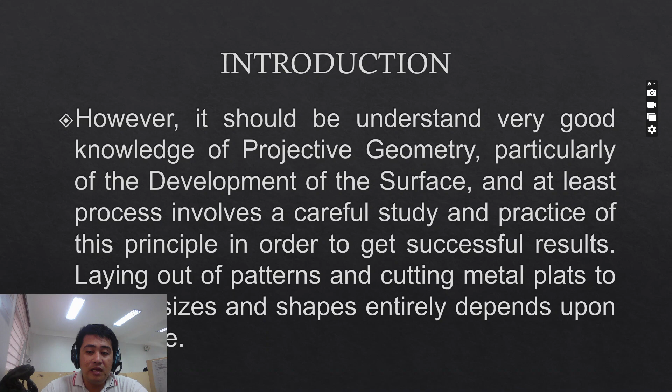However, it should be understood that very good knowledge of projective geometry, particularly of the development of surfaces, and that this process involved careful study and practice of this principle in order to get successful results. So, laying out of patterns, which is shown in the video presentation, and cutting metal plates to correct size and shapes entirely depends upon the same.

So, metal used, nag-i-slideshow ba?

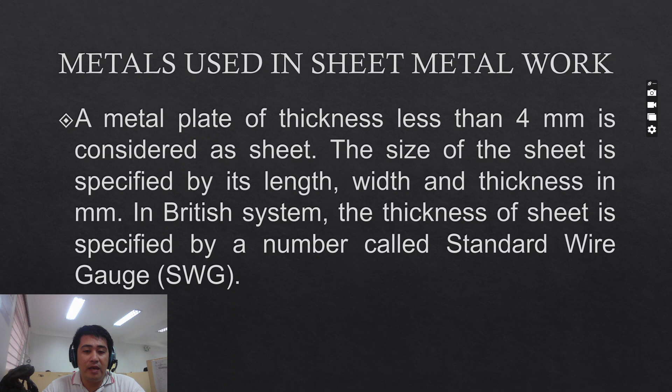Nakikita pa ba yung presentation? Sir, hindi po nag-slide. Hindi nag-slide.

Okay pa? So, meron lang papakita rito additional video presentation para dun sa dinisuss ko kanina all about metals.

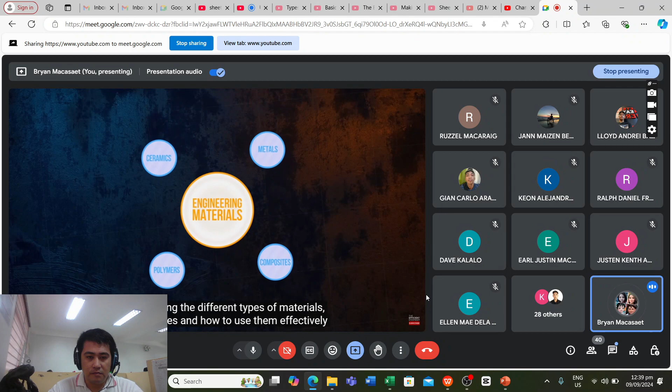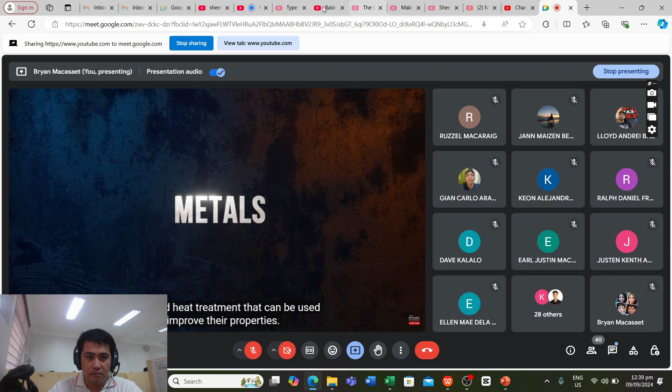Understanding metals. Engineering materials are normally split into 4 categories: metals, polymers, ceramics, and composites. Understanding the different types of materials, their properties, and how to use them effectively is a crucial part of engineering. In this video, we'll explore metals, their microstructure, and different techniques like alloying and heat treatment that can be used to improve their properties. Around 2/3 of the elements in the periodic table are metals, although for engineering purposes, we're particularly interested.

Boses lang, walang video. Meron, sir. Boses lang po, sir. Walang video. Meron naman po. Share ko ulit.

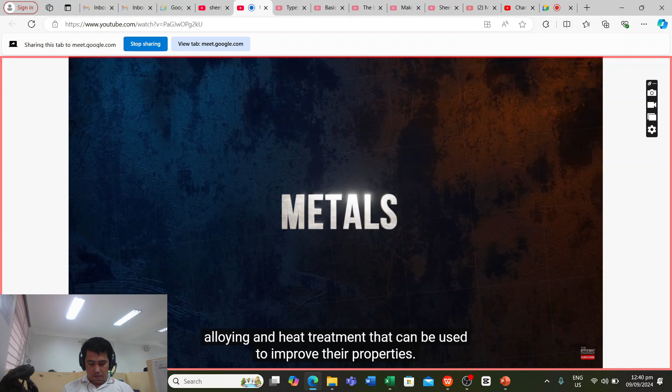Thanks to CuriosityStream for sponsoring this video. Engineering materials are normally split into 4 categories: metals, polymers, ceramics, and composites. Understanding the different types of materials, their properties, and how to use them effectively is a crucial part of engineering. In this video, we'll explore metals, their microstructure, and different techniques like alloying and heat treatment that can be used to improve their properties. Around 2/3 of the elements in the periodic table are metals, although for engineering purposes, we're particularly interested in just a handful of them.

Iron is probably the most important of them all because it's used to create steel, a high-strength material with a

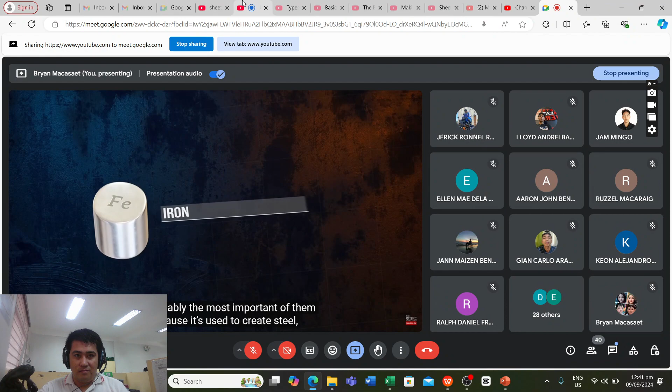Sa iba po, kita na daw. Kita naman po. Sabi wala daw. Kita po sir. Kita naman po sir. Sige, sige. Kita po. Kita sa akin. Okay pa.

Wide range of engineering applications. Aluminum is commonly used because its alloys have high strength-to-weight ratios. It has a relatively low melting temperature, which makes it easier to process and use for casting, and it's relatively inexpensive. Like aluminum, titanium has excellent strength-to-weight properties, although it is even stronger, making it a popular choice for aerospace applications. Its high melting point makes it suitable for applications at high temperatures, but makes processing more difficult. It's also much more expensive than aluminum. Other important metals include magnesium, copper, and nickel.

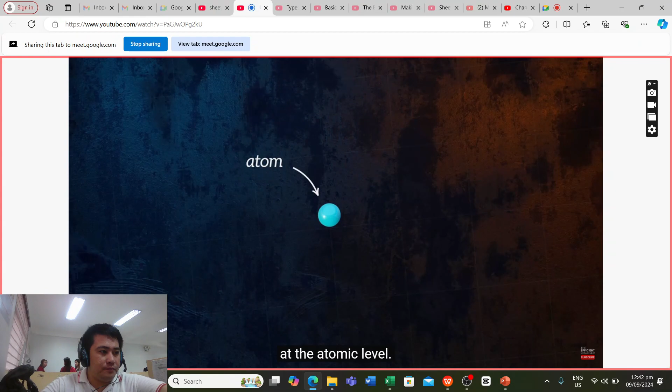The key to using these metals effectively lies in understanding how they're structured at the atomic level. The atoms of a pure metal are packed together closely and are arranged in a very regular grid. Because of this regular structure, metal is what we call a crystalline material, and the grid the atoms are arranged in is called the crystal lattice. Not all materials have a regular structure like this. In glass, for example, the atoms are arranged randomly, so it's an amorphous material, not a crystalline one.

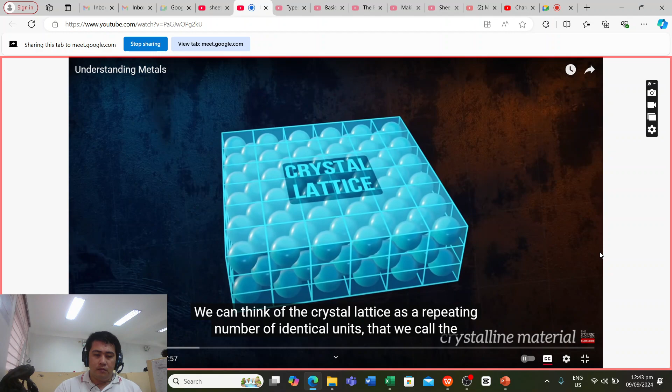We can think of the crystal lattice as a repeating number of identical units that we call the unit cell. There are several different ways the atoms of a metal can pack together, which means that there are several different types of unit cell. At room temperature, copper atoms, for example, pack together as shown here, where there is an atom at the corner of each unit cell and one at the center of each face. We can see this better if we shrink the size of the atoms and display the bonds between them. This is called the face-centered cubic structure, or FCC.

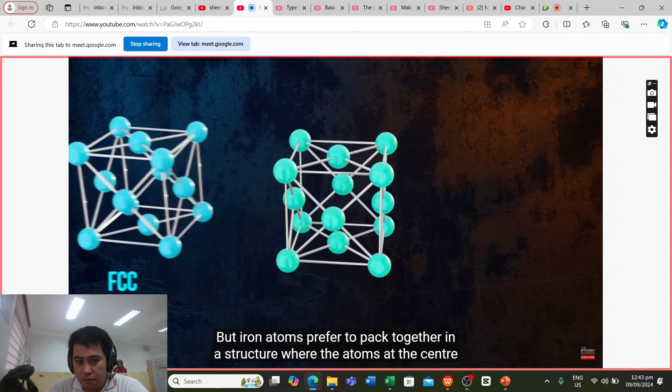But iron atoms prefer to pack together in a structure where the atoms at the center of each face are replaced by a single atom in the middle of the unit cell. This is the body-centered cubic structure, or BCC. And titanium atoms prefer to pack together in what's called the hexagonal close-packed structure. These are the three most common crystal structures in metals.

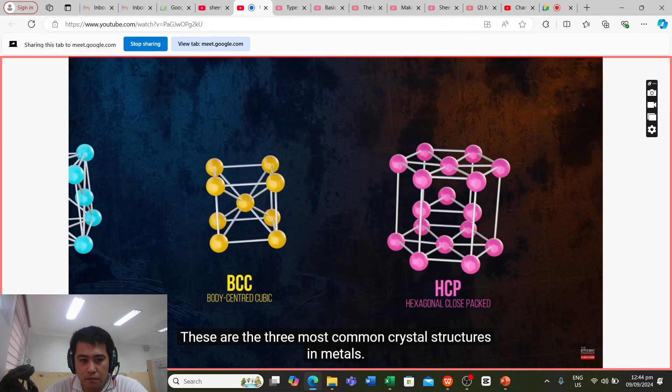Both the FCC and the HCP structures have a packing factor of 74%, meaning that the atoms occupy 74% of the total volume of the unit cell. The BCC structure is slightly less closely packed, with a packing factor of 68%. The close packing of the atoms is one of the reasons metals have much higher densities than most other materials.

In reality, lattices aren't perfect like the one shown here, but contain numerous defects, of which there are several different types. A vacancy defect occurs when an atom is missing from the lattice. An interstitial defect occurs when an atom squeezes into the gap between existing atoms in the lattice. This is a self-interstitial defect, since the extra atom is of the same element as the lattice, but interstitial defects can also be created by impurity atoms of a different element. And then we have substitutional defects, where certain atoms in the lattice are completely replaced by impurity atoms. These are all point defects, because they affect a single location within the lattice.

Lattices also contain linear defects, called dislocations, where a number of atoms are offset from their usual position in the lattice. The first type of dislocation is an edge dislocation, where the lattice contains an extra half plane of atoms. Let's shrink the atom size so that we can show the atomic bonds. This is a stable configuration, but when a stress is applied to the lattice, the atomic bonds break and reform, allowing the extra half plane of atoms to glide through the lattice.

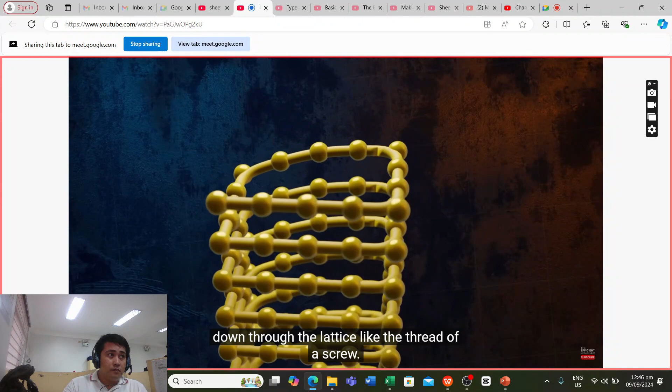Another type of dislocation is the screw dislocation, where an entire block of atoms is shifted out of alignment with the perfect lattice structure. It gets its name because if you follow a path of atoms around the dislocation, it will spiral down through the lattice like the thread of a screw. Again, when a shear stress is applied, the atoms rearrange into a new stable configuration. Most real dislocations will actually be a combination of edge and screw dislocations.

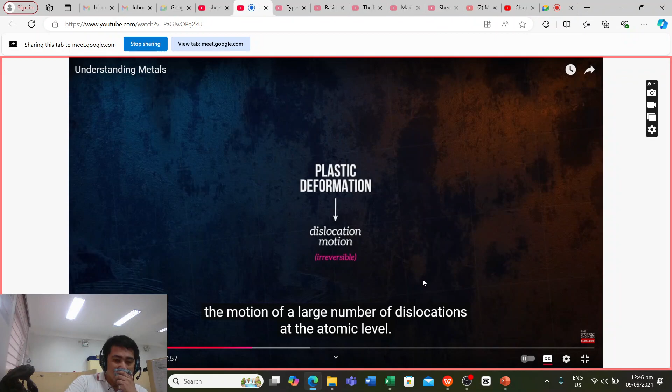Because dislocations move through the lattice by the breaking and reforming of atomic bonds, the process is irreversible. A dislocation doesn't return to its original position when the applied shear stress is removed. This is the underlying mechanism behind plastic deformation in metals. It's essentially the motion of a large number of dislocations at the atomic level. Elastic deformation is caused by the stretching of atomic bonds. Unlike the motion of dislocations, this stretching is completely reversed when the load is removed.

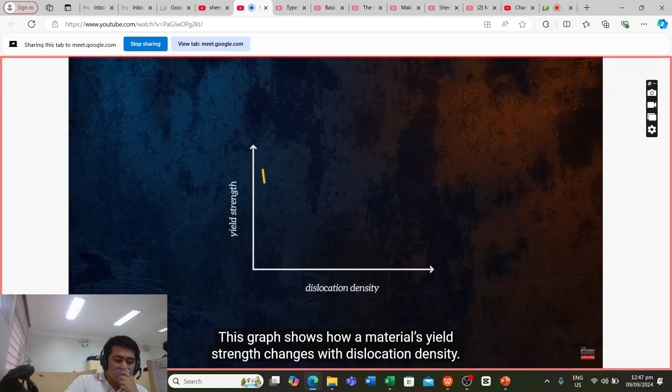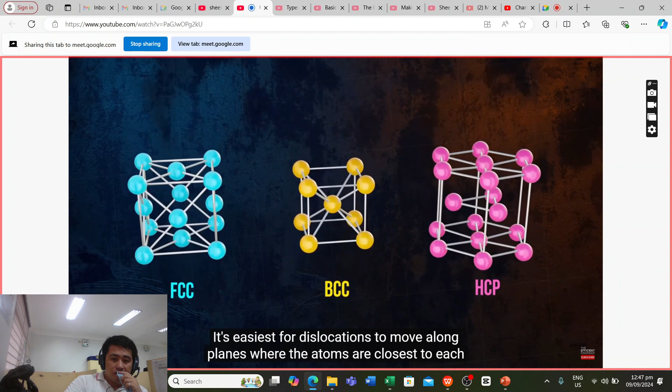This graph shows how a material's yield strength changes with dislocation density. Materials that contain a large number of dislocations have improved strength because dislocations can get tangled, preventing each other from moving through the lattice. The motion of dislocations through the lattice is also affected by how the atoms pack together. It's easiest for dislocations to move along planes where the atoms are closest to each other, since it's easier for those bonds to break and reform. This corresponds to different planes depending on the structure of the unit cell.

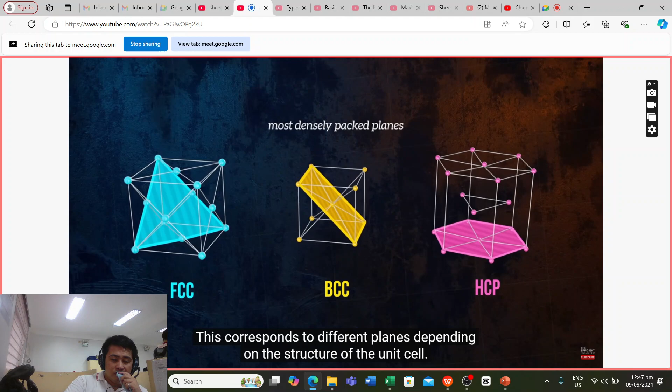In reality, even pure metals don't maintain a regular crystalline structure over long distances. Let's zoom in to some molten metal and see how it solidifies. As the metal cools down, atoms group together and a lattice structure begins to form in several different locations at the same time. Each of these lattices has its own orientation, and as the metal cools down, the lattices continue to grow until it has completely solidified. We end up not with one continuous lattice, but with multiple lattices that are oriented in different directions.

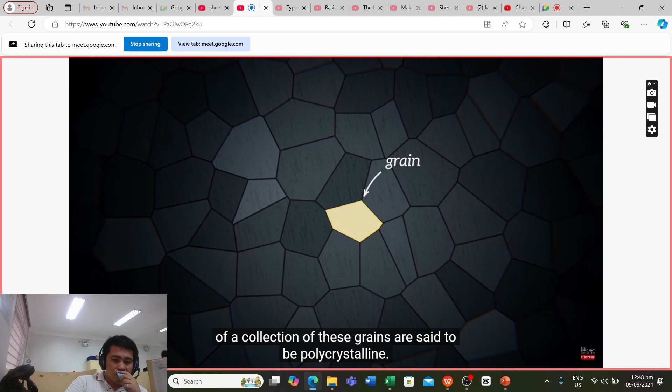This creates what we call grains within the metal structure, and materials made up of a collection of these grains are said to be polycrystalline. The grains are separated by grain boundaries. Since each grain has specific planes along which it's easier for slip to occur, the presence of grains impedes the motion of dislocations, and so polycrystalline materials tend to be stronger than materials made up of a single uniform crystal.

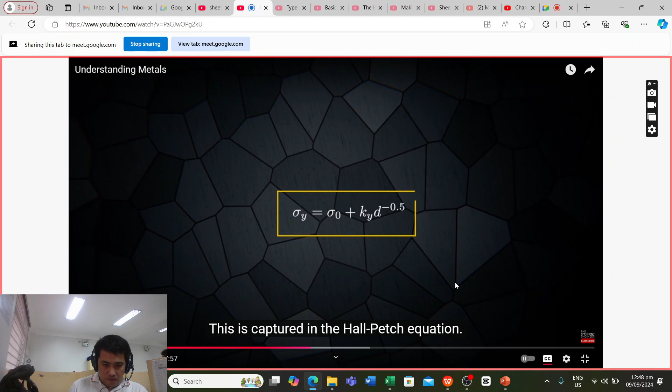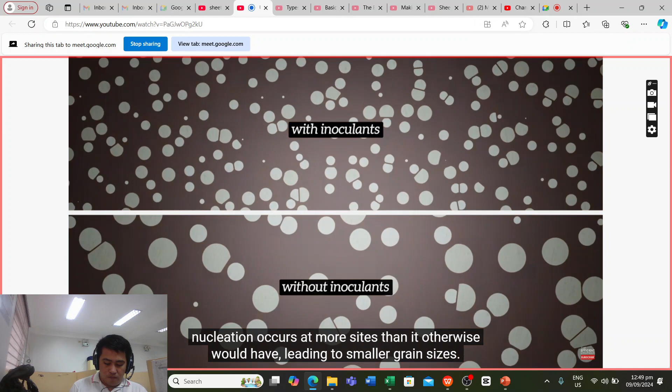The smaller the grain size, the stronger the material will be. This is captured in the Hall-Petch equation. We can use this information to intentionally strengthen metals by controlling the size of the grains that form as the metal is cooled. Impurities called inoculants can intentionally be added to the molten metal so that crystal nucleation occurs at more sites than it otherwise would have, leading to smaller grain sizes.

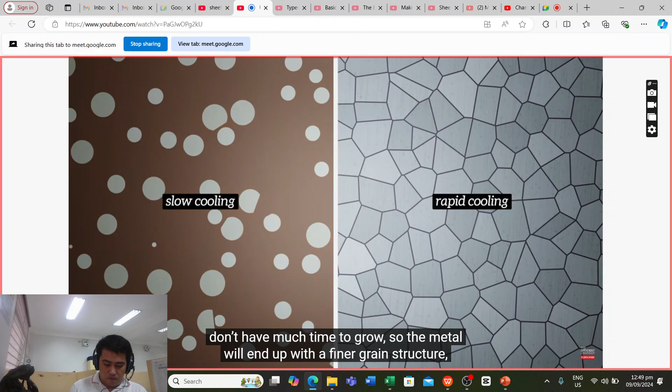Another way we can do this is by controlling how fast the metal is cooled. If a metal is cooled very rapidly, nucleation occurs at more locations and the crystals don't have much time to grow, so the metal will end up with a finer grain structure and will be stronger as a result. Controlling grain size to strengthen a metal is called grain boundary strengthening.

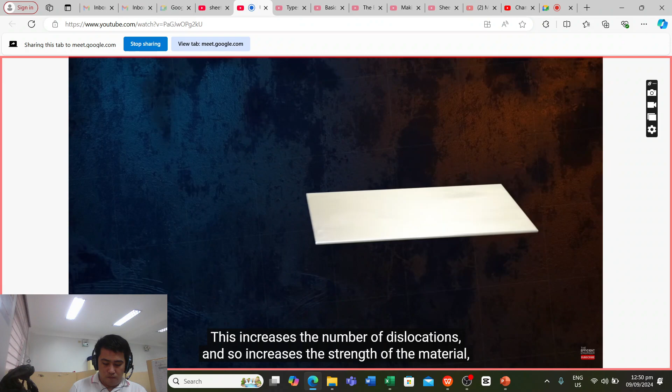This is just one of many strengthening techniques. We can also strengthen a metal by plastically deforming it, using techniques like cold rolling or forging. This increases the number of dislocations, and so increases the strength of the material at the cost of reducing its ductility. This is called work hardening.

One very useful quality of metals is that they can be mixed with small quantities of other metallic and non-metallic elements to improve the properties of the base metal in some way. Metals that are created by combining different elements in this way are what we call alloys. We typically split metals and their alloys into ferrous and non-ferrous categories, depending on whether or not the base metal of the alloy is iron.

Brass, for example, is a non-ferrous alloy of copper and zinc. It typically contains 65% copper and 35% zinc, although other alloying elements are sometimes added. It is used for its attractive appearance and the ease with which it can be machined.

Aluminum alloys are important in engineering and are often used for the good strength properties they provide at a light weight and reasonable cost. Common alloying elements are copper, manganese, silicon, zinc, and magnesium. Aluminum alloys are classified according to whether they're designed to be used for casting or to be worked, and are designated using specific numbering systems.

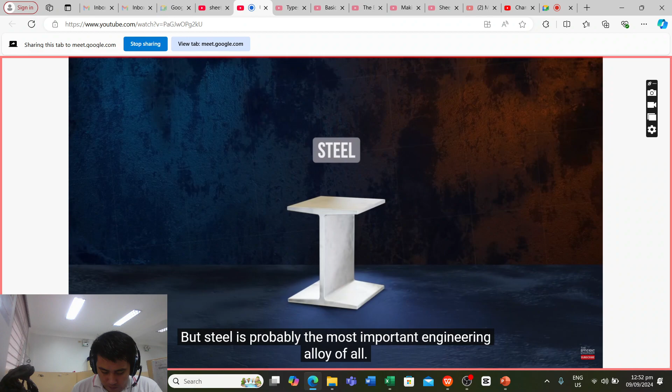But steel is probably the most important engineering alloy of all. Pure iron is too soft for it to be used for structural purposes, but it can be combined with small amounts of carbon, and in some cases, other elements, to produce steels that have incredibly useful properties.

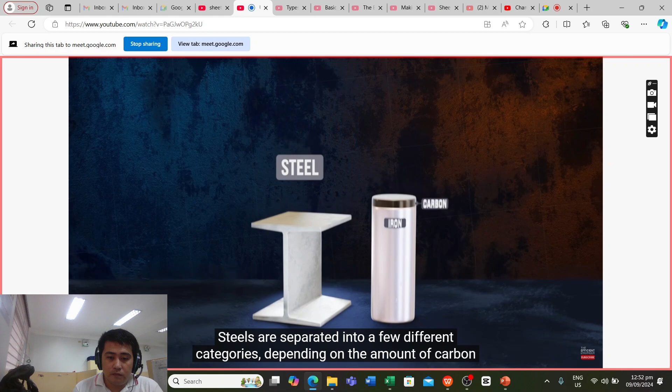Steels are separated into a few different categories, depending on the amount of carbon and other alloying elements. Low carbon, or mild steel, contains up to 0.25% carbon. It doesn't have particularly high strength, but is ductile and relatively low cost. Medium carbon steel contains between 0.25 and 0.6% carbon, and high carbon steel contains between 0.6% and 2% carbon.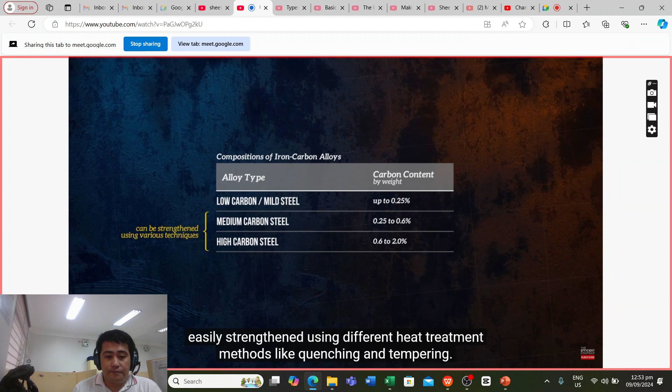Since these steels contain a larger amount of carbon, they are stronger and can be more easily strengthened using different heat treatment methods, like quenching and tempering. Between 2% and 4% carbon,

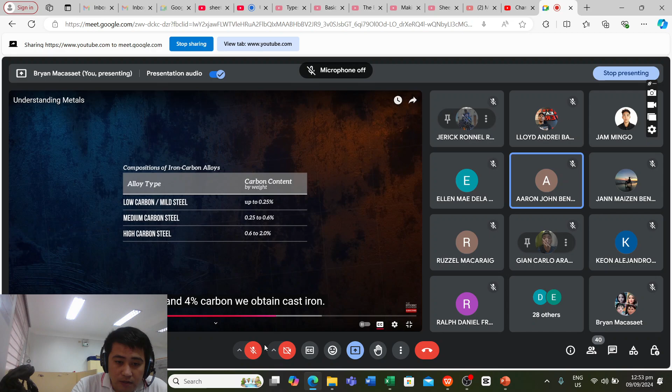So far, okay po, sir. Okay, wala naman po sa likod.

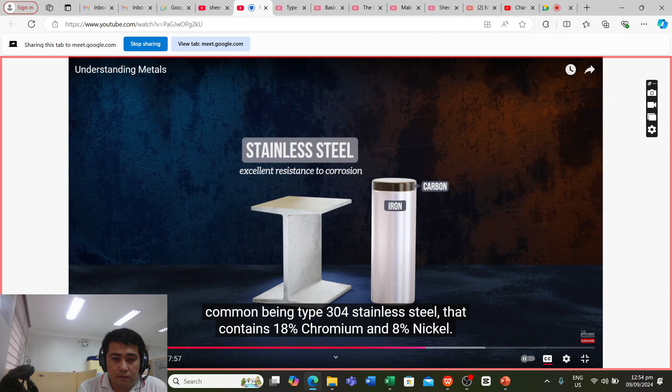We obtain cast iron. It has good fluidity, and the additional carbon lowers the melting point of the alloy, making it good for casting, although it tends to be brittle. We can add additional elements to the iron-carbon mix to obtain specific properties. Stainless steel, for example, incorporates chromium to provide resistance to corrosion, the most common being Type 304 stainless steel that contains 18% chromium and 8% nickel.

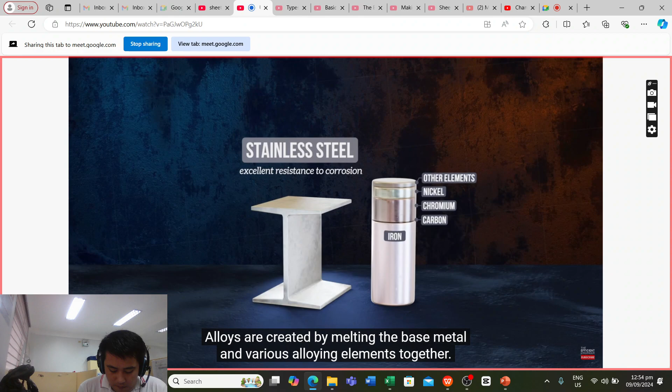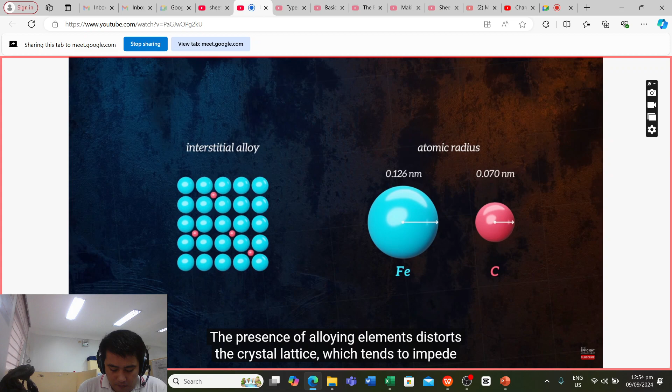Alloys are created by melting the base metal and various alloying elements together. They can either be substitutional or interstitial, depending on the relative size of the atoms. Steel is an interstitial alloy because the atomic radius of carbon is much smaller than the atomic radius of iron. The presence of alloying elements distorts the crystal lattice, which tends to impede the motion of dislocations, and so has a strengthening effect. This is called solid solution strengthening.

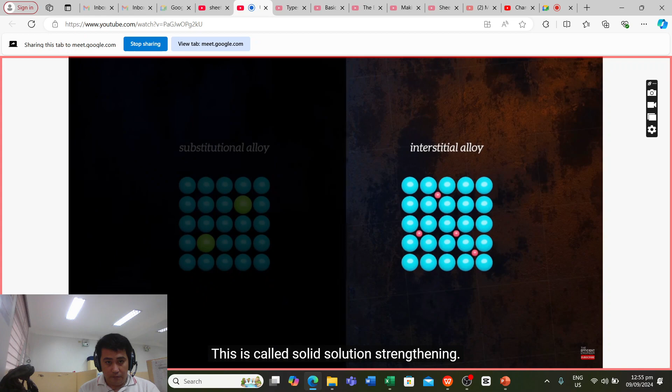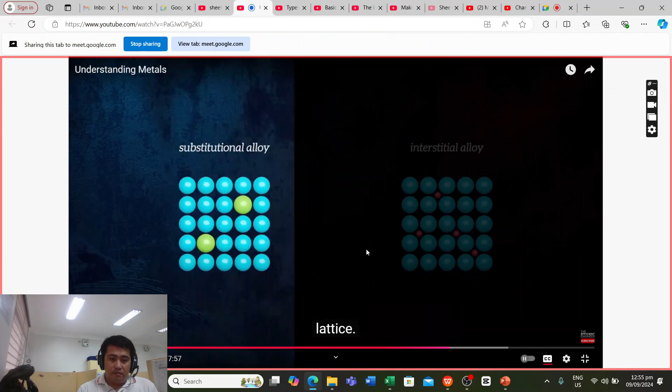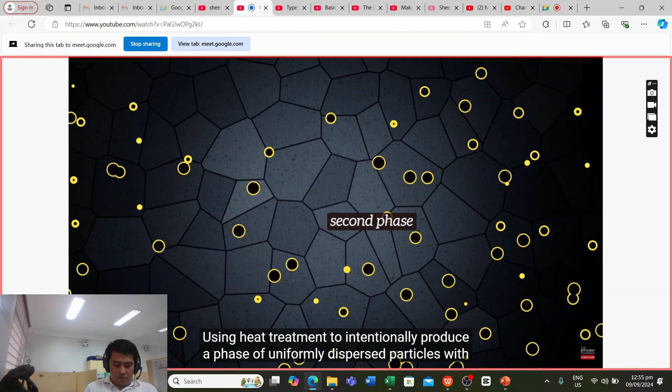But the alloying elements aren't always able to fully dissolve into the base metal's lattice. If an alloying element is added beyond a certain saturation point, it can separate out and produce a distinct homogeneous phase within the metal's microstructure that has a different composition. There are several different ways the particles making up the second phase can be incorporated into the material, and, unsurprisingly, they can significantly affect the properties of the material. Like grain boundaries, the boundaries between phases impede the motion of dislocations and increase a material's strength. Using heat treatment to intentionally produce a phase of uniformly dispersed particles with the goal of strengthening a material is called precipitation hardening.

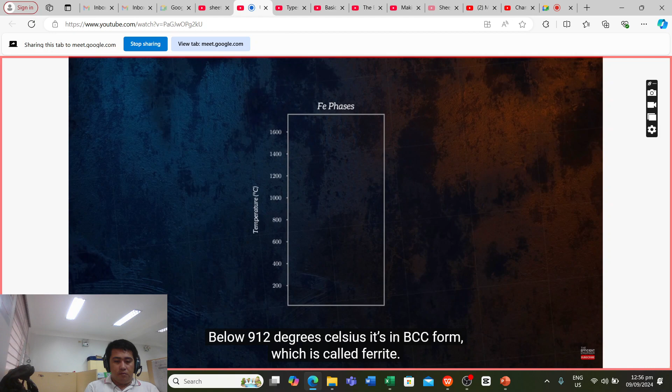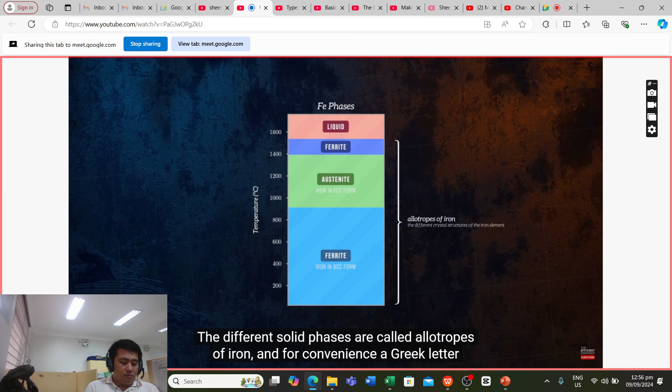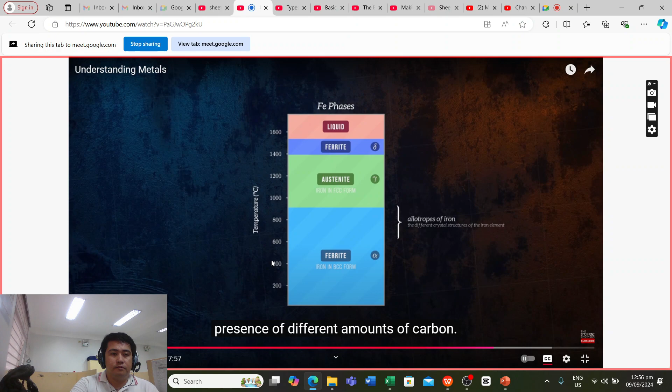Pure iron goes through several phase transformations with changes in temperature. Below 912 degrees Celsius, it's in BCC form, which is called ferrite. Above 912 degrees, it changes from BCC to FCC, which is called austenite. It then changes back to BCC at 1394 degrees, and the melting point is at 1538 degrees. So above that, it's a liquid. The different solid phases are called allotropes of iron, and for convenience, a Greek letter is assigned to each one. We can extend this diagram to show how the phases within the material change with the presence of different amounts of carbon.

This is what is called the phase diagram for the iron. Okay, so from the video presentation, it is clearly manifested na ang bawat uri ng metals ay may pinagdadaanang kanya-kanyang proseso. And then when we say alloy, syempre it's a mixture of several elements. So, iba't iba rin yung proseso at iba't iba rin yung present elements. So, pinapakita dyan sa video presentations kung paano nagiging mild steel, paano nagiging halimbawa aluminum alloy, and then ano yung mga process involved sa pagmomold ng metal. Merong tinatawag na work hardening.

Okay po. So far, can you follow? Yes, sir. Okay po. Sige, let's continue. Yes, sir.

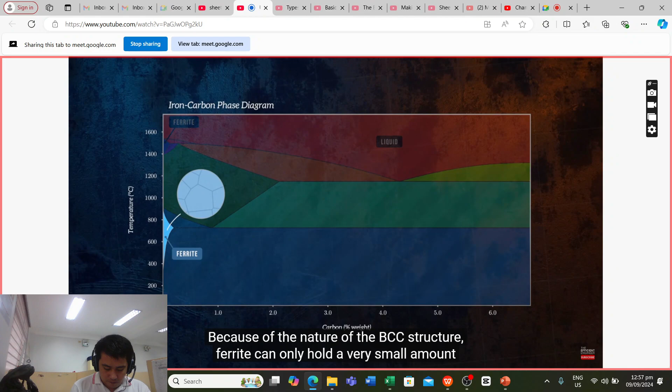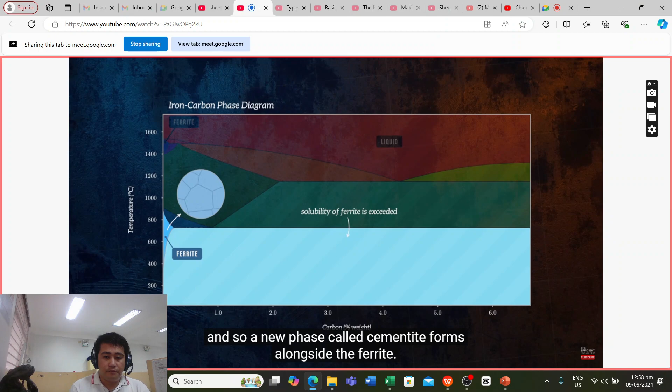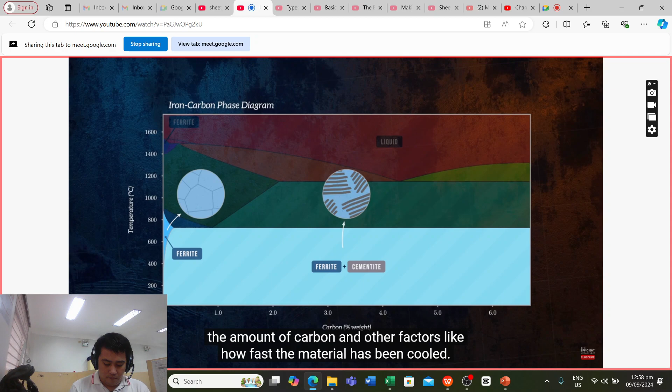Iron carbon alloy. Because of the nature of the BCC structure, ferrite can only hold a very small amount of interstitial carbon. When the solubility of ferrite is exceeded, the extra carbon atoms have to go somewhere, and so a new phase called cementite forms alongside the ferrite. Cementite is a hard, brittle compound made up of one carbon atom for every 3 iron atoms, which corresponds to 6.7% carbon by weight. A two-phase ferrite cementite material looks something like this. The exact way in which the two phases combine together within the material will depend on the amount of carbon and other factors, like how fast the material has been cooled.

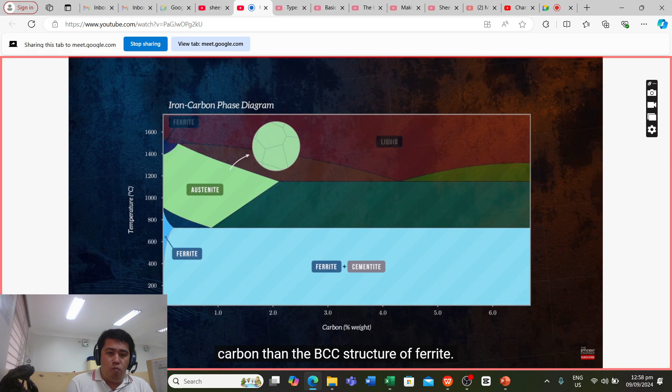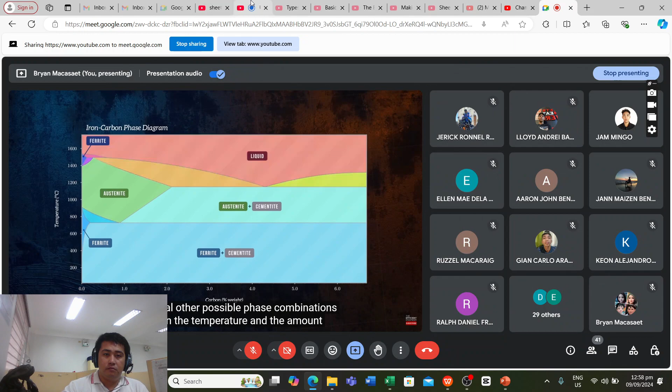Because of its FCC structure, austenite can hold a much larger amount of interstitial carbon than the BCC structure of ferrite. But in the same way, if more carbon is added, we obtain a two-phase material with austenite and cementite phases. There are several other possible phase combinations depending on the temperature and the amount of carbon present. The presence of a cementite phase can have a significant strengthening effect, which is part of the reason steel is much stronger than pure iron.

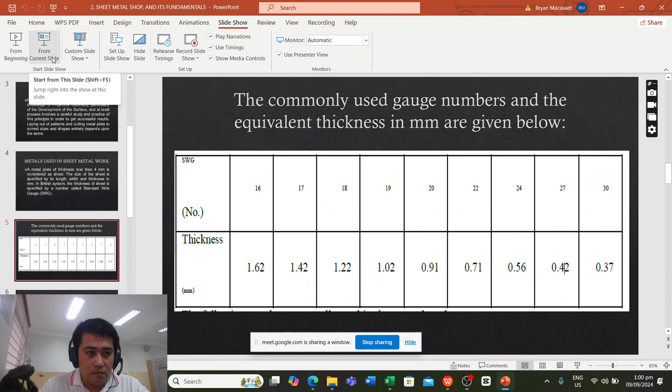Okay, so I think meron na tayong mas malinaw na interface about metals. So bakit siya tinatawag na crystalline? Di ba kanina pinaresent din yung tatlong uri ng crystallized form ng metal. Okay po, nalinawan po ba kayo all about metals? Okay, so we will proceed with the next topic.

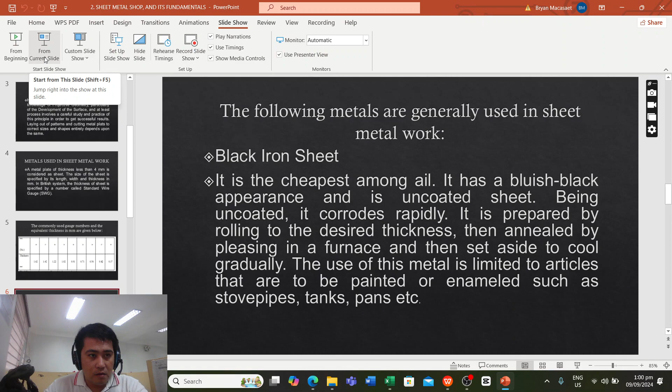Okay po. So, the following metals are generally used in sheet metal work. So, meron tayong black iron sheet. Mamaya papakita ko rin yun sa video presentation para mas malinawan kayo.

So, when we say black iron sheet, from its description, color black, it is the cheapest among all. It has a bluish black appearance and is uncoated sheet. Being uncoated, it corrodes rapidly. It is prepared by rolling to the desired thickness, then annealed by heating in a furnace, and then set aside to cool gradually. So, the use of this metal is limited to articles that are to be painted or enameled, such as stovepipes, tanks, pans, etc.

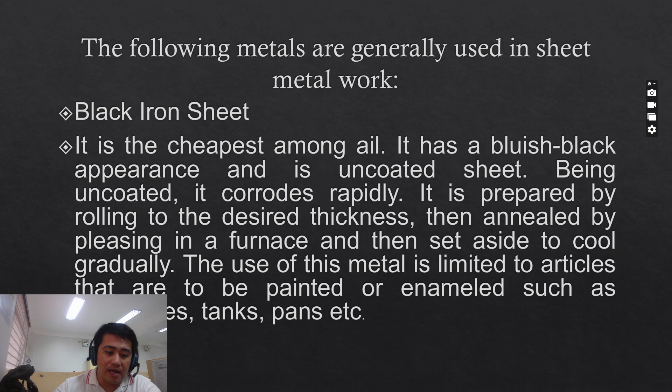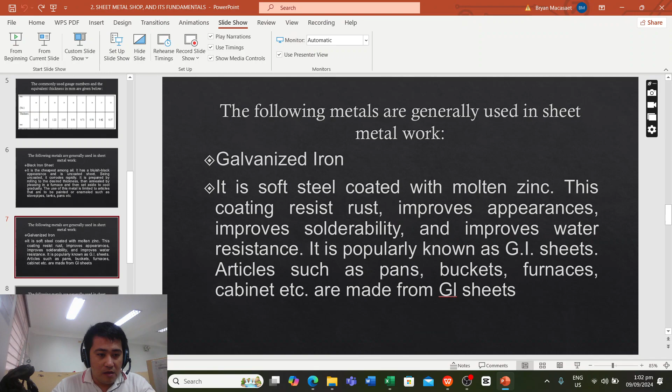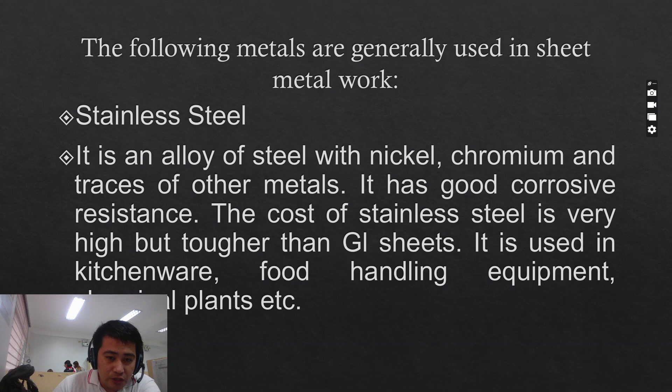Okay, next, stainless steel. It is an alloy of steel with nickel. Pag sinabing alloy, combination of two or more elements. So, ang stainless steel ay pinagsamang steel with nickel, chromium, and traces of other metals. It has good corrosion resistance. The cost of stainless steel is very high, but it is tougher than GI sheets. Yung stainless steel, yung makintab, kita nyo sa body, yung makikintab ang body. So, it is used in kitchenware, food handling equipment, chemical plants, etc.

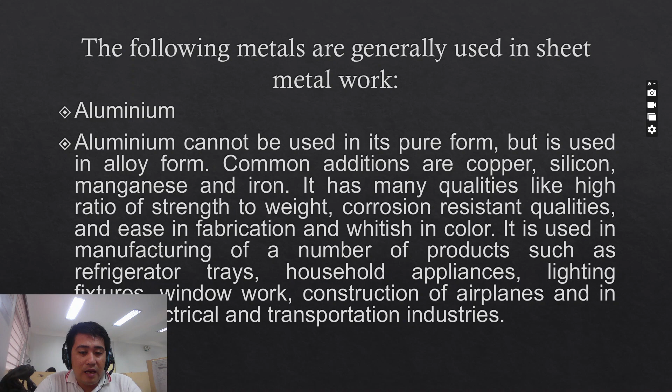Okay po. Next, we have aluminum. So, aluminum cannot be used in its pure form, but it is used in alloy forms. Common additions are copper, silicon, manganese, and iron. So, hindi ginagamit ang aluminum ng pure, palagi siyang may kasama. It has many qualities like high ratio of strength to weight, corrosion resistant qualities, hindi madaling kalawangin, and ease in fabrication, and whitish in color, yung maputi. So, it is used in manufacturing of a number of products such as refrigerator trays, household appliances, lighting fixtures, window work, construction of airplanes, and in many electrical and transportation industries.

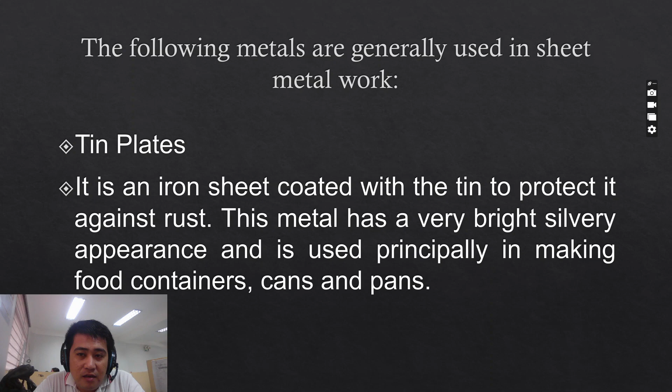Next, we have tin plates. It is an iron sheet coated with tin to protect it against rust. This metal has a very bright silvery appearance and is used principally in making food containers, cans, and pans. So, yung tin plates yung ginagamit sa mga canned goods, kalimitan. Okay pa? So far, can you follow? Yes, sir. Okay po.

Okay po? So, may tanong po kayo sa types of sheet metal? Wala po, sir. Okay po. That ends our lesson 2. Walang questions for lesson 2? Okay. So, next we will proceed with lesson 3. For the meantime, I will stop the recording muna for lesson 2.